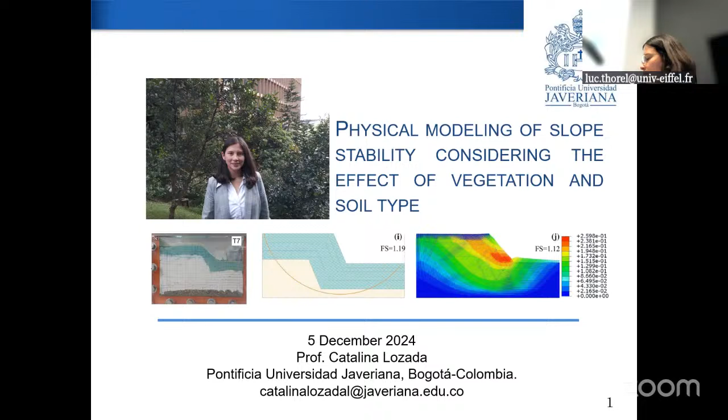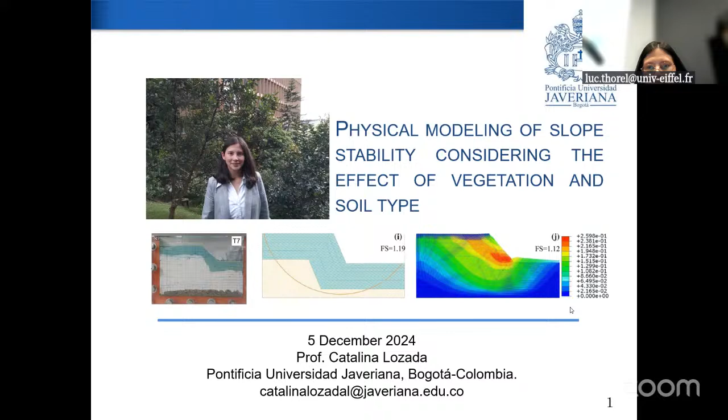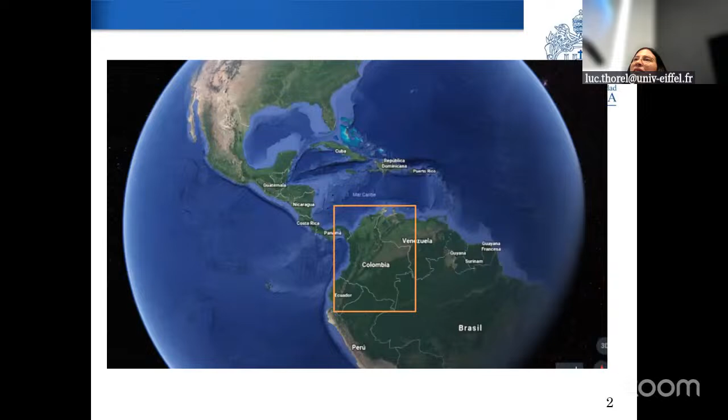I'm coming from Colombia. It is a country located in South America, in the north of South America. I'm coming from Bogota. Bogota is a city of almost 8 million inhabitants, and we have an altitude of 2,500 meters above mean sea level.

This is the university I'm coming from. It's a Catholic university, one of the oldest universities in Colombia. There are almost 30,000 students, and I belong to the civil engineering department.

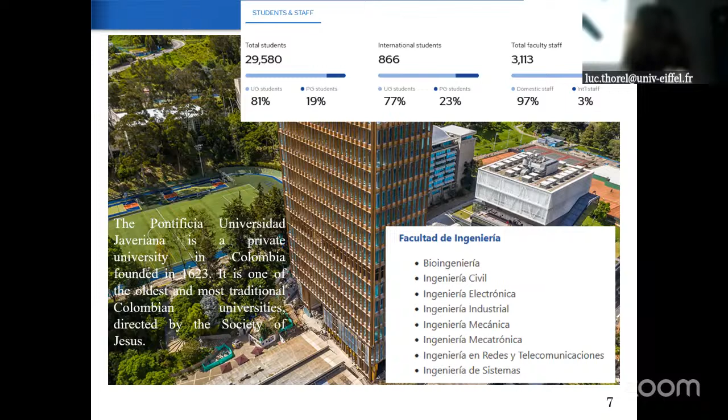This building, as you see here, is the laboratory engineering building. We have many facilities.

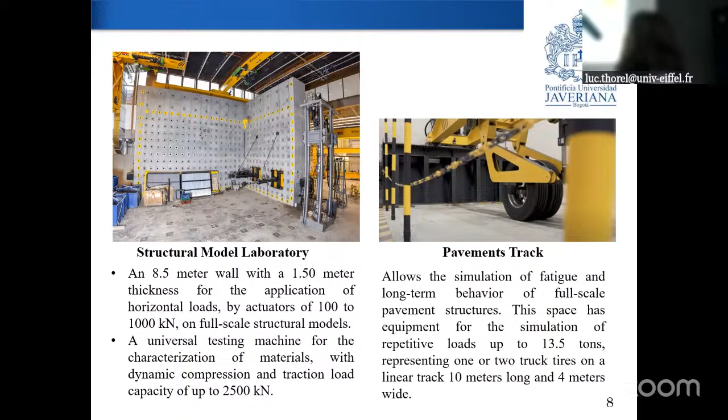There is a big reaction wall for simulating buildings at real scale, to apply loads with these actuators. There is also a pavement track to simulate fatigue and long-term behavior of full-scale pavement structures.

And also we have a laboratory for geotechnical engineering. We have a cyclic triaxial test, Bender elements, resonant columns, simple shear cyclic test, and hollow cylinder test, among others. A large shear test to test geosynthetics also.

I am a member of the research group CECATA, the Center for Studies in Roads and Transportation and Related Fields. We are 6 or 7 professors. Fredy did his PhD here a long time ago, I think in fatigue. I don't know if you know him.

So we have 3 research lines, and I'm working in 2: comprehensive development of Colombian infrastructure, and analysis and modeling of geotechnical processes. The objective of this group is to develop, validate, transfer, and adopt technologies in areas related to infrastructure.

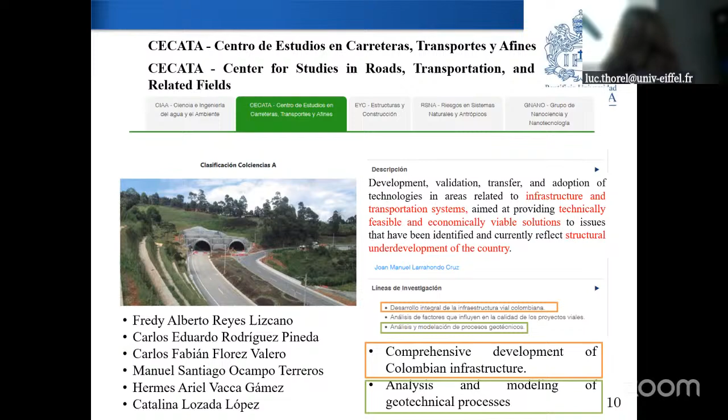In the first part of this presentation, I would like to show you some challenges we are facing in Colombia. We have the Andes mountains that begin in Argentina, in the south of South America, and in Colombia they are divided into 3 mountain ranges: the Eastern, Central, and Western Mountain Ranges. Bogota, for example, is located here in the Eastern Mountain Range.

So we face many problems about slope stability in urban areas, because Bogota is located just at the border of the mountain. In fact, we have a very deep clay deposit, but we also have problems of slope stability, and also highway infrastructure problems, because the main cities in Colombia are located in the Andes mountains.

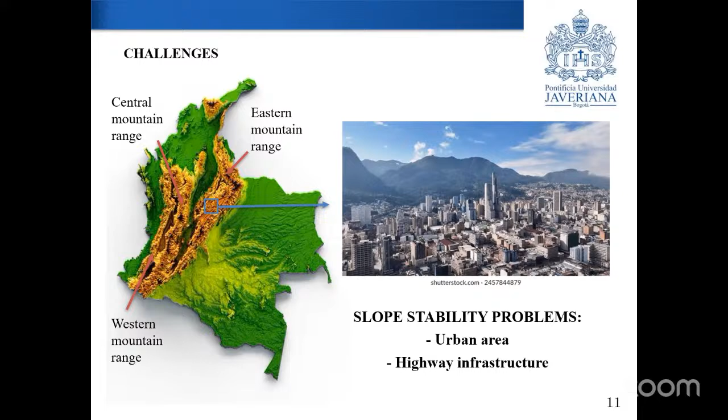So I want to show you an urban problem that we visit with the students. There are many exploitation pits for construction in the city. There are more than 100 quarries at different stages of exploitation. Right now it's not permitted, but there are many environmental problems about this, and also slope stability problems, because many houses are constructed close to these older quarries.

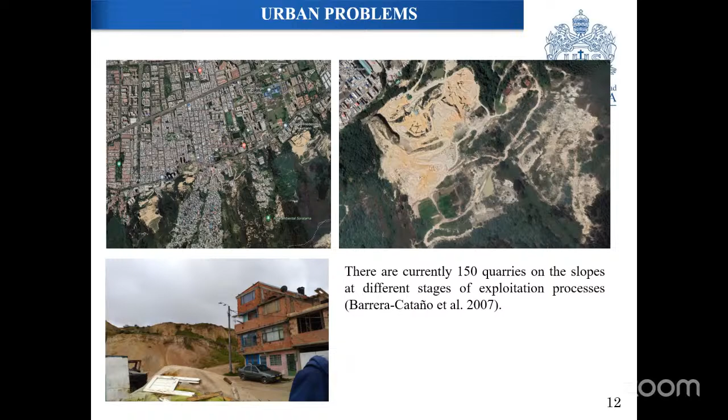These are 2 views with Google Earth. We can see the environmental problems, and we just visited some places that the mayor of Bogota is trying to recover.

So we see with the students stabilization techniques for the slopes. As you can see here, gabions, soil nailings, and some protection to control erosion. Also, they plant native plants to restore the environment there. So we are interested in studying the effect of vegetation, and we would like to understand the effect of native vegetation on the problems of shallow slope stability.

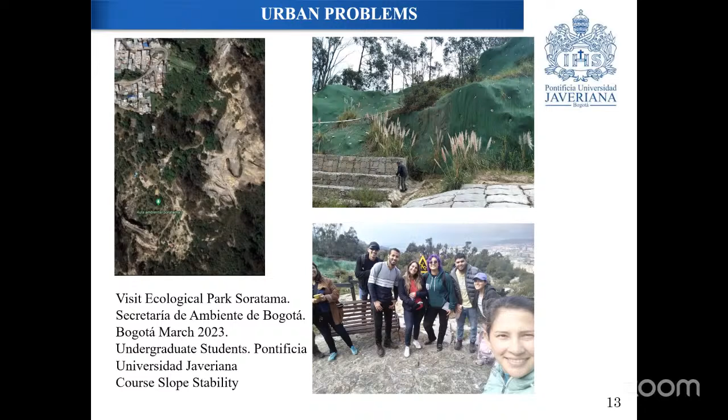So we are here with the undergraduate students, just working around this and to see these problems.

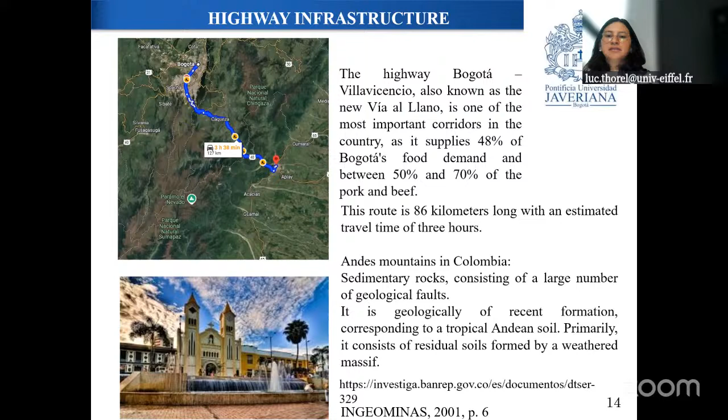Another problem we face in the linear construction of roads is, for example, this is Bogota, and this is another city called Villavicencio. This is one of the main highways, one of the most important highways in Colombia, because around half of the food supplies come from this region, for Bogota. So the road is very unstable. It is in the Eastern Mountains, as I showed you before. These mountains are composed of sedimentary rocks consisting of a large number of geological faults. It's geologically of recent formation corresponding to a tropical Andean soil.

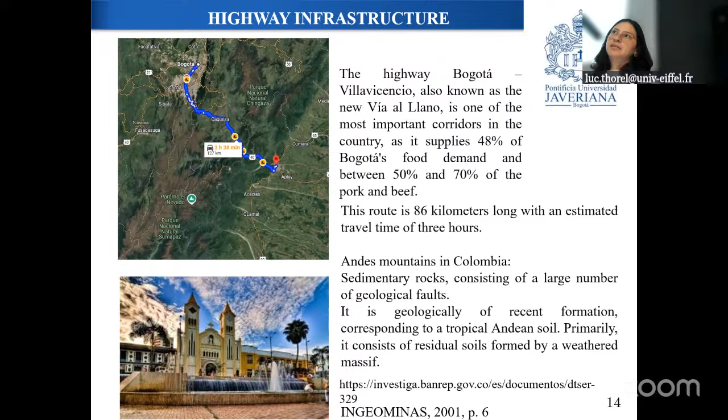Primarily it consists of residual soils formed by weathered massive rock. There is some reference here just to understand the geological formation, but it's very difficult to construct around the mountains in general in Colombia. So the interaction of different types of soils, alluvial, residual, tropical soils, landslide deposits, debris deposits, among others, makes construction very difficult.

Also, we face intense seismic activity and rainfall activity, which makes the slope stability of the highways a challenge, especially during rainy season.

So I would like to show you a video we took in October of this year during a visit with the master's course on slope stability. So we see here a big sliding process, and there was the oldest highway and the new highway that is constructed just to avoid this kind of problem. So we see here two rivers and typical vegetation of this region.

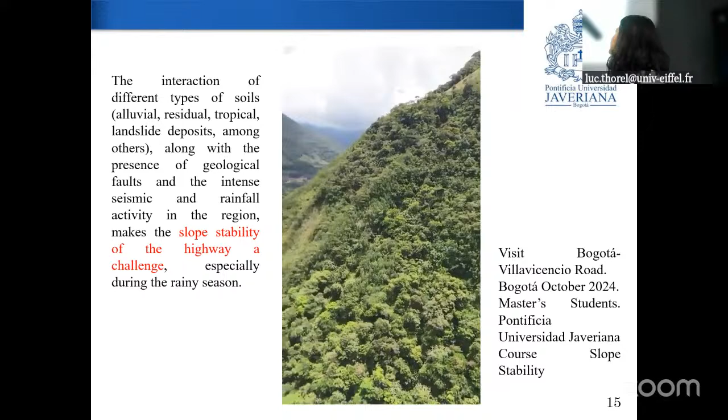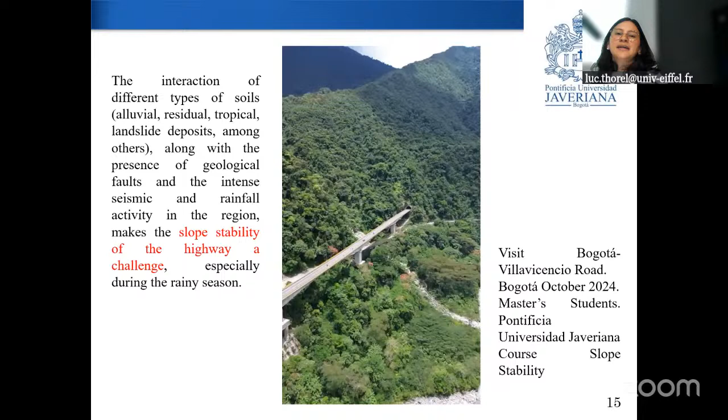This is one of the parts that we visited on the highway, but there are many problems like this in this road. So we were there. Because of that, we are very interested in studying slope stability in general in Colombia.

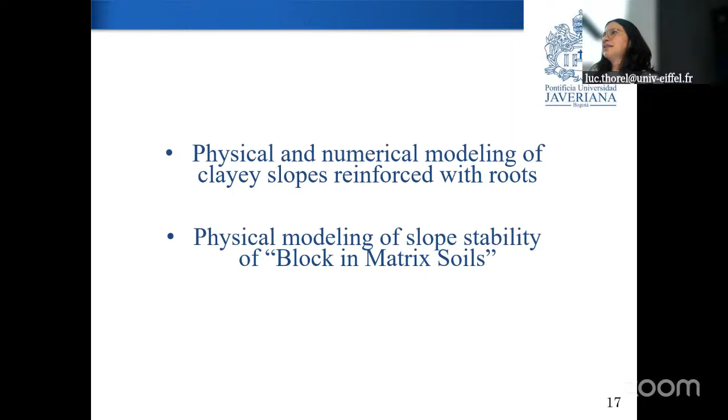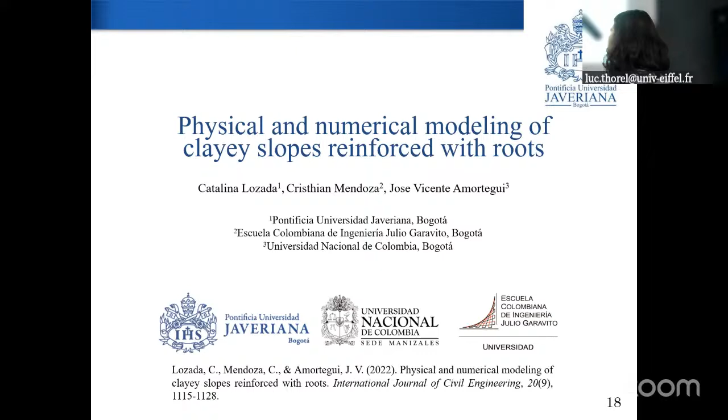The presentation is divided into 4 parts: problem and objectives, methodology, results and analysis, and conclusions. The problem we want to study here is the contribution of grass roots on slope stability. The roots of grass improve slope stability in 2 ways. The first way is there is a mechanical contribution of roots that increases the soil resistance. It can also function as little anchors inside the slope. But it depends on many variables: root shape, strength, plant age, root depth, root inclination, soil type, among others.

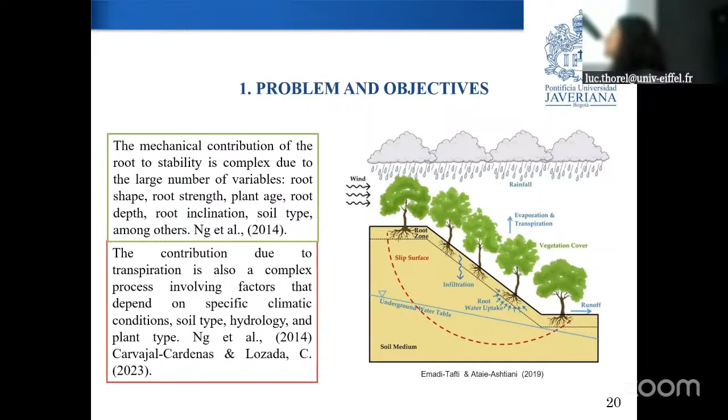This problem has been studied by many researchers, such as this one in 2014. Also, the other contribution of roots is evapotranspiration, as the trees evapotranspirate depending on climatic conditions also. The water content of the soil decreases and the suction level increases, creating an increase of shear strength of soil. So this factor also depends on climatic conditions, soil type, hydrology, and plant type. We also studied this phenomenon, studying the effect of matric suction on slope stability.

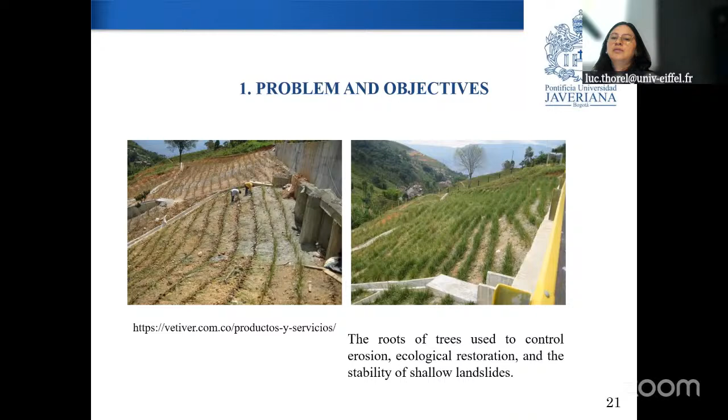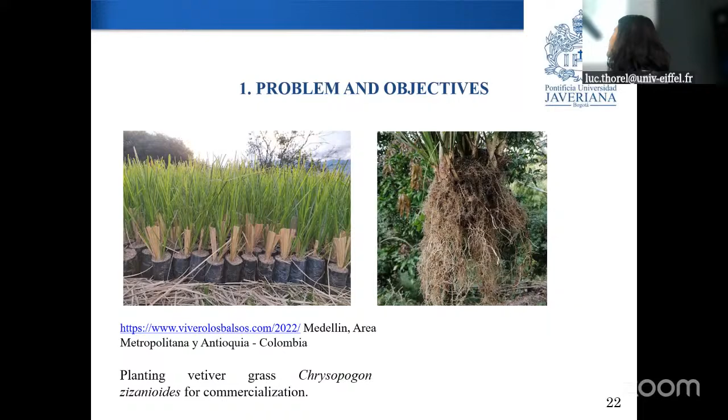But here we want to study the mechanical effect of roots. This is a very common practice in Colombia. There is specifically one type of grass that we use for this: vetiver. It's called vetiver grass, and the roots can be very, very long. They are used to control erosion, ecological restoration, and stability of shallow landslides. They are commercialized. We can see here the plants and the shape of the roots of this plant.

Here we have a figure from this paper, and we see that this grass can reach a depth of 1 m in only 3 months. So this is a very high growth grass. The growth of the grass is very fast.

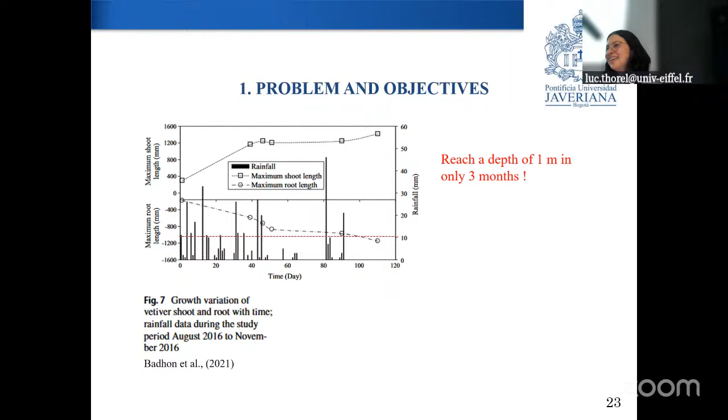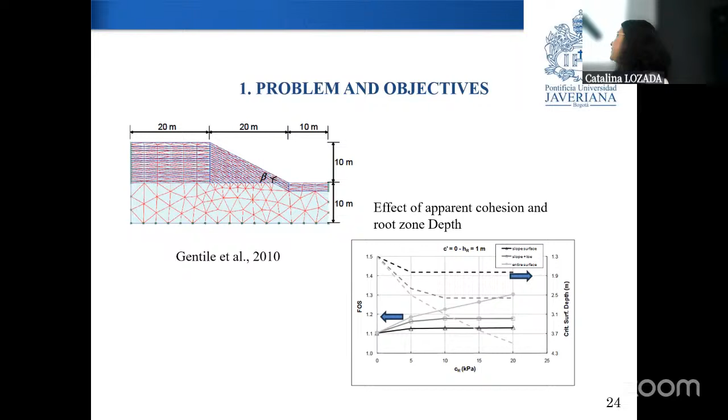So there are some numerical simulations. This is one of them, Gentile 2010. He tried to model the effect of the grass on the soil, on the slope, varying different parts of the growth of the grass. As a result, there is an increase in cohesion due to the effect of the reinforcement of the grass, which produces an increase in the safety factor. Here he made the simulation using finite element tests. Also, he found that the critical surface depth of the slide decreases as the reinforcement increases.

There are many authors that have modeled this physical modeling trying to simulate roots. One tried to print with a 3D printer, others have planted real grass or real trees in the soil. But it's very difficult to simulate in a centrifuge because of the scaling laws of soil resistance, morphology, depth, among others.

Eab in 2015 made some tests in centrifuge also in Japan. They mixed polyester fiber with sandy soil to find shear strength parameters similar to the reinforced soil produced by grass.

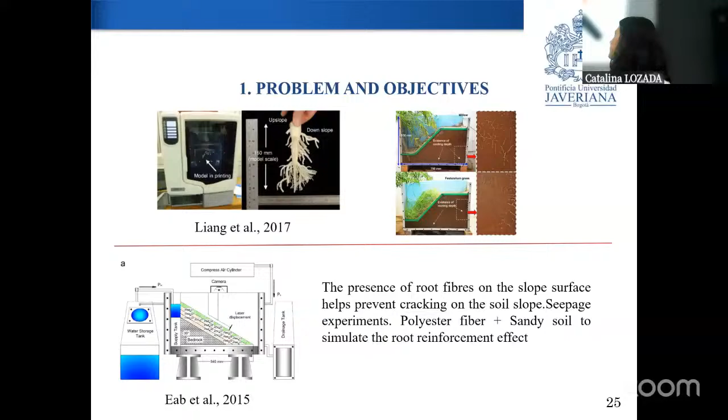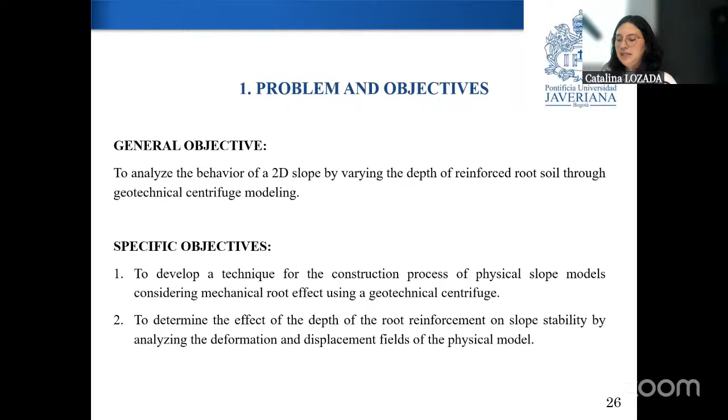So in this research, we analyzed the behavior of a 2D slope, varying the depth of the reinforced soil, through geotechnical centrifuge. First we developed a technique for the construction process, then we determined the effect of the depth of root reinforcement on slope stability by analyzing the deformation and displacement on the physical model.

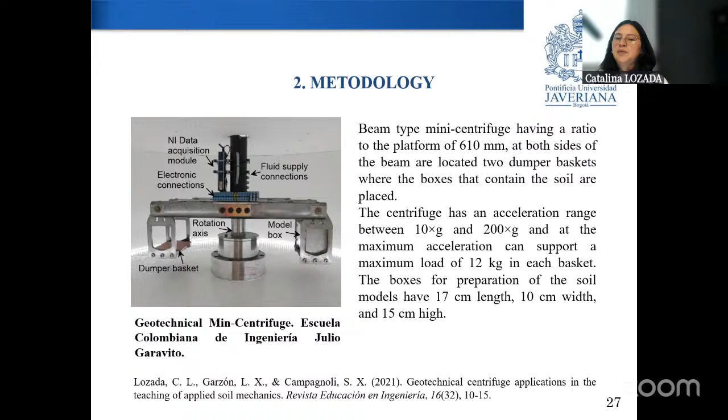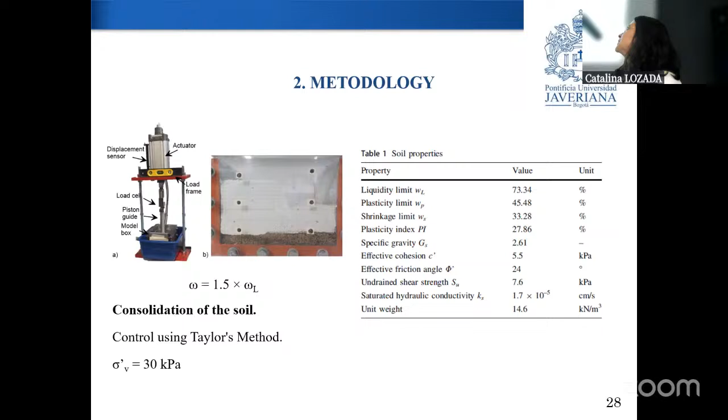We made a triaxial test to find the cohesion, effective cohesion, and effective friction angle. We found an effective cohesion of 5.5 kilopascals and an effective friction angle of 24 degrees. So we mix the kaolin soil, and then after consolidation we cut to reach the geometry of the slope we want to simulate.

So we first make the slope without reinforcement. We try to simulate a slope that fails, reaching a safety factor of 0.8 according to limit equilibrium with the Bishop's method.

So in the centrifuge, we find many sliding surfaces. The model scale was 100, with a time equivalent to the prototype of 42 days.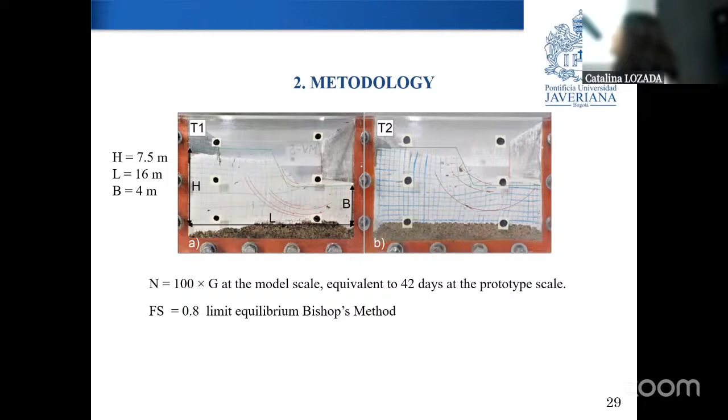This dimension is 7.5 meters, this dimension is 4 meters, and this one is 16 meters, for the prototype scale.

So to simulate the grass, we used fiberglass mixed with the kaolin at the same liquid limit. We mix this, put colorant to distinguish the zone, and place it like this. Then we fill this part with sand, and consolidate again, just to have the shape of the slope.

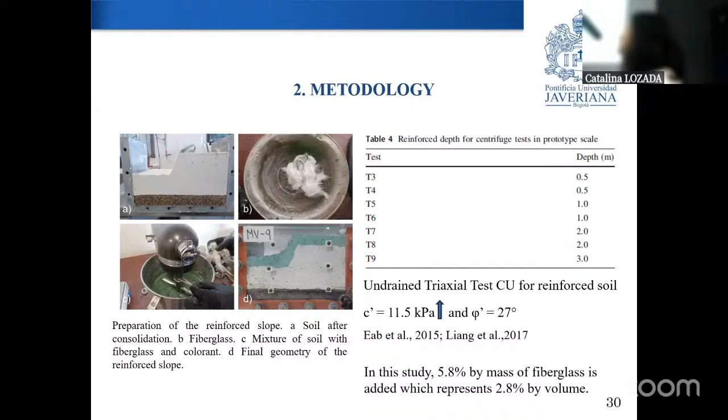We made 9 models, each depth repeated 2 times, just to verify the model. Then we made a triaxial test with the reinforced soil. We tried many times to find the adequate proportion for the models to obtain a cohesion similar to the grass. So we have an increase of cohesion of about 6 kilopascals, and not too much change in friction.

At the end of the test, we made analysis for all of these tests, though I'll show just one here. We made the analysis of the images after and before the test, using the GeoPIV_RG software, defining this line from the crest of the slope to compute the resultant displacements and compare all the models.

So here we have the depth and the resultant displacement for all models. We can see that the models without reinforcement present the higher resultant displacement, followed by 0.5 meters of reinforcement, 1 meter, 2 meters, and 3 meters, decreasing the resultant displacement as the depth of the grass increases.

Here we can see this figure plotted another way: the root depth versus the resultant displacement. We can see there are two slopes in this figure. In the first part, the slope is higher, and then after 1 meter of root depth, the slope decreases, reaching almost a stabilization of the resultant displacement.

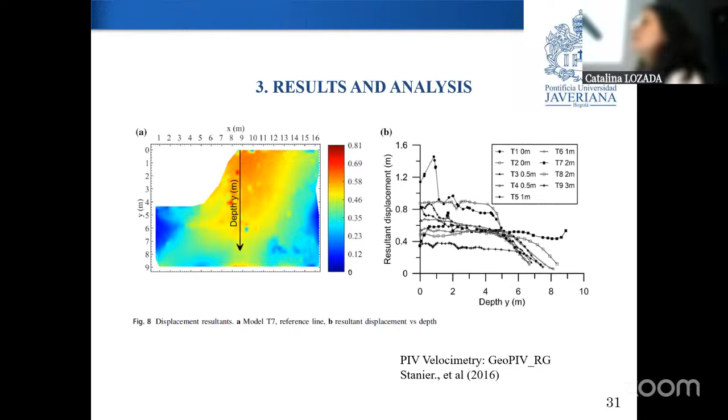We can also see the depth of the sliding surface, which we can calculate here when there is a change in the slope. And we see, as shown in the numerical models before, that there is an increase in the sliding surface depth.

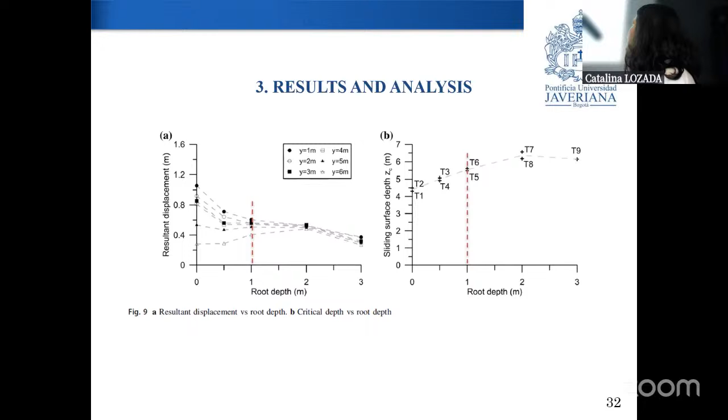So we made 2-dimensional simulations in the Abaqus program, because we need to compare the factor of safety with the limit equilibrium method. We implemented the shear strength reduction method in Abaqus to find the factor of safety using a Mohr-Coulomb model, and also used the GOE5 program for the limit equilibrium analysis, using also Mohr-Coulomb and Bishop's method.

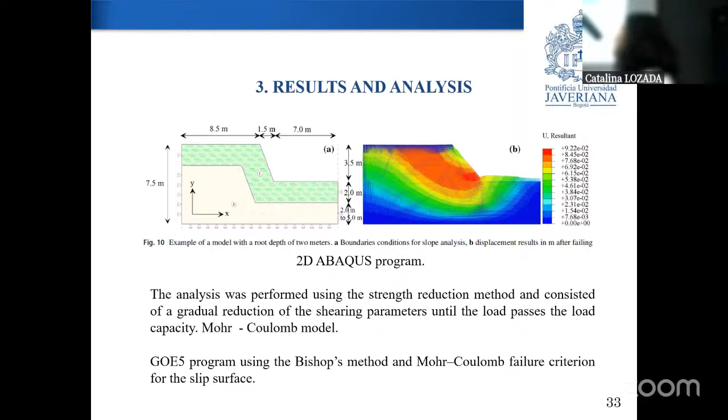Here we have the numerical models, the finite element method, and the limit equilibrium method, varying the depth. As obtained in the experimental test, the depth of the sliding surface depends on how the reinforcement increases. In this figure, we compare the results obtained in the numerical models with Bishop's limit equilibrium analysis and the finite element method, and also the deformation of the crest.

Here we compare the finite element results with the centrifuge test. We obtained higher deformations in the centrifuge test. It's difficult to model in finite element methods because there are very large deformations in the centrifuge, so there is some error here, but we have the same trend.

We find that at about 1 meter of reinforcement, we have almost the same value of deformation of the crest. Also, we can see that the factor of safety increases until 1 meter of reinforcement, and after that point it changes.

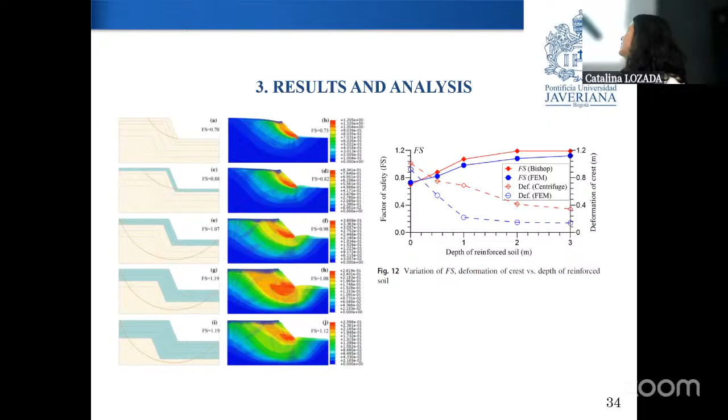This is the first part I wanted to show you. The conclusion, I think I already mentioned it. This is the bibliography, and I think I have time. Now the other part is physical modeling of slope stability of block in matrix soils.

This work was performed by Pedro, the master's student who conducted all the tests. We presented this work at the Colombian Congress of Geotechnical Engineering in November, from the 5th to the 9th of November this year.

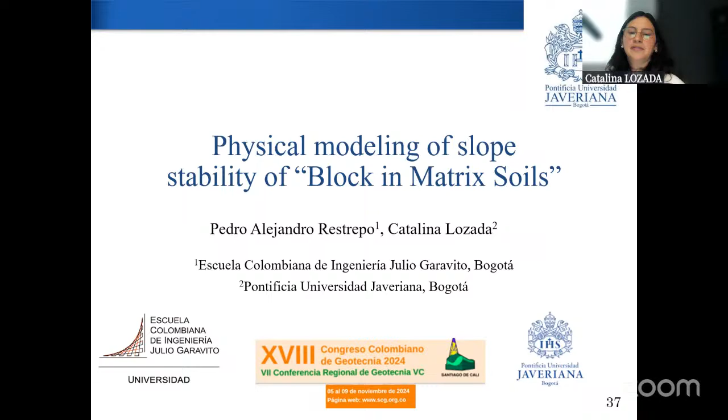As I showed at the beginning of the presentation, we face many problems because of the geology of the mountains generally in Colombia. We have many materials, a wide variety of deposits that we can consider block in matrix soils: residual soils, mud flow deposits, debris flow deposits, colluvium, torrential deposits, among others.

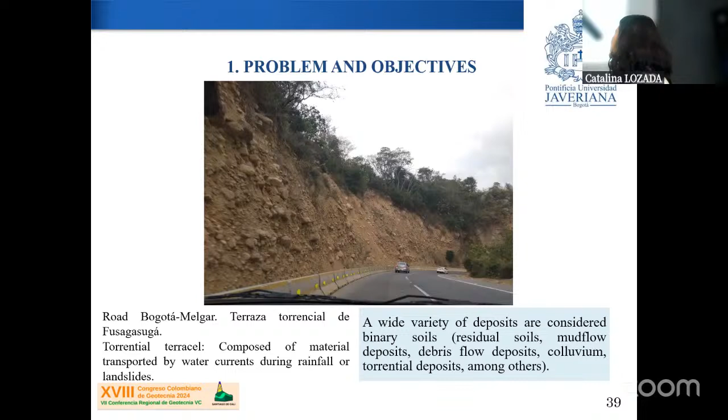For engineering practice, it's very difficult to design for this. When we ask how they determine the parameters to design these slopes, they rely heavily on back analysis to find parameters, because doing a conventional test on this soil is not representative of the actual scale of the problem. So it's difficult, and it's a challenging question.

Here we see an almost vertical slope as well. This type of soil has been described and studied mainly by Medley and Napoli, around 2021 and 1998, who named it blocky matrix soils to describe these mixtures of soil with rock blocks applied to slope stability. It's well known from previous research that the weight concentration of particles determines the shear strength, as we see in Vallejo 2000. The behavior in slope stability is directly related to the increasing volume block proportion.

In the triaxial test, we can see from the literature this type of curve, showing behavior of soil that depends on the weight of the fine and coarse fractions. This also depends on the normal stress. For example, at 40% we see an increase of peak shear strength that then decreases at higher values of fines content. We can also see two or three types of behavior relating to the amount of smaller particles.

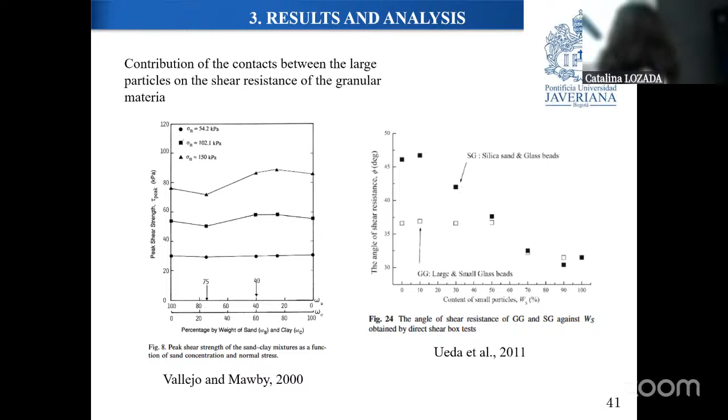These mixtures of soils applied to slope stability have been studied numerically by Medley, Napoli, and more recently Montoya Araque. They find a circular sliding surface in a homogeneous slope without blocks, but the effect of blocks produces a tortuosity in the failure surface depending on the amount of block proportion—specifically the volumetric block proportion, or in 2D analysis, the areal block proportion.

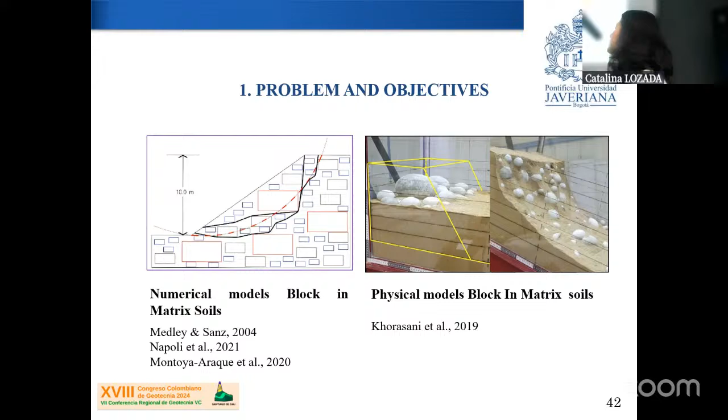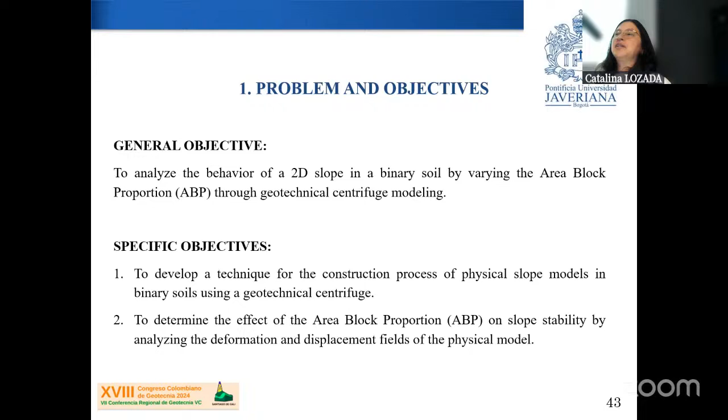I found this physical modeling study, but in a 1G test, at reduced scale. We wanted to analyze the behavior of this slope in a binary soil, varying the area block proportion, using the geotechnical centrifuge. Our first objective was to develop a technique for the construction process, and then to analyze the deformation and displacement fields, using the same machine as I showed you.

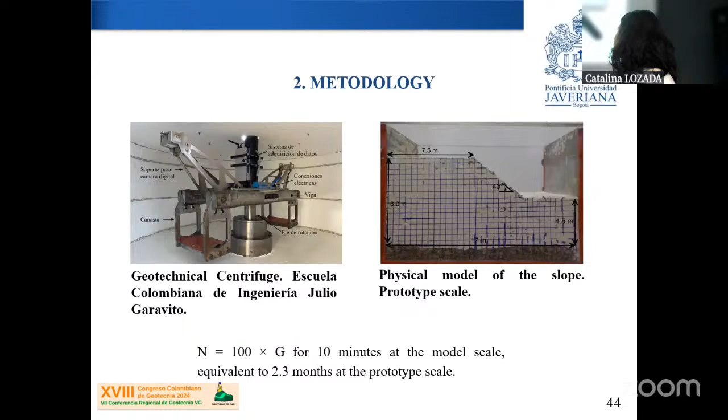These are the physical models of the slope. Medley in 1994 established that there is a characteristic dimension for these types of problems, and in slope stability it is the slope height. In this case, the height of the slope is 3.5 meters, this dimension shown here.

He suggests that particles with a dimension higher than 5% of LC are considered blocks, and less than 5% are part of the matrix. If the particles are higher than 75%, rock mechanics should be applied.

So we use this to obtain the dimension of the simulated blocks at a prototype scale. We use a diameter of 0.8 meters, which corresponds to 23% of LC. To simulate the blocks, we use aluminum bars that have a density of 2.7 grams per cubic centimeter, to simulate the rocks.

We did these four models, varying the areal block proportion: 11, 14, 16, and 19%. We didn't have time to do more simulations, so we just have these configurations.

We tried many different techniques to prepare the soils, because it was very difficult, as we also had to consider the compressibility properties of the soil. At the first step, we just prepared the slope and the soil, mixing at 1.5 liquid limit, and then put the bars inside.

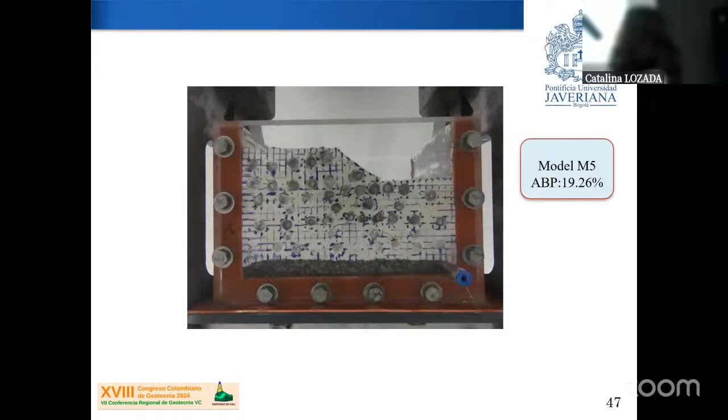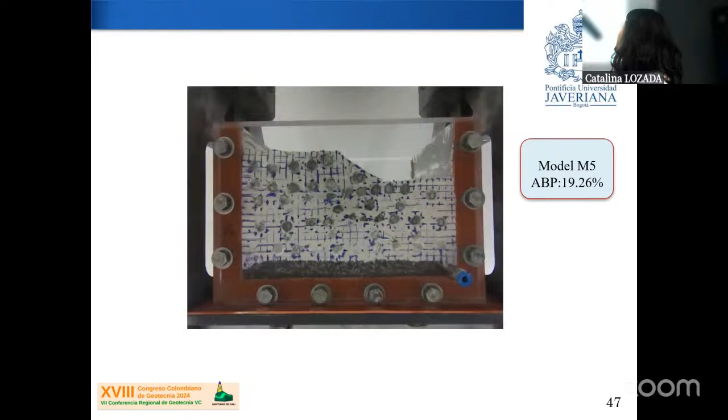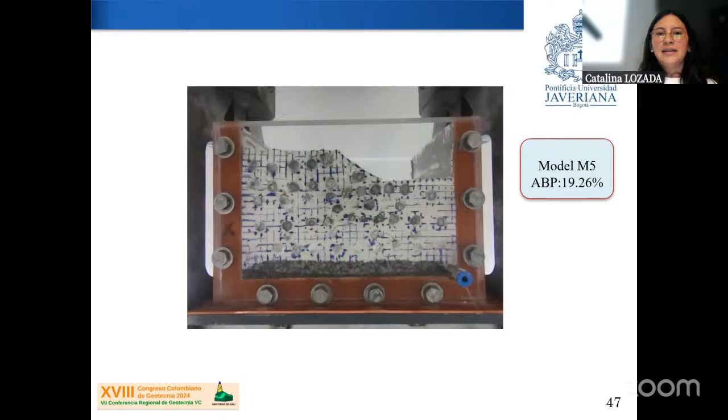You see? No? We can see it again. Okay, this was accelerated, it wasn't so fast like this.

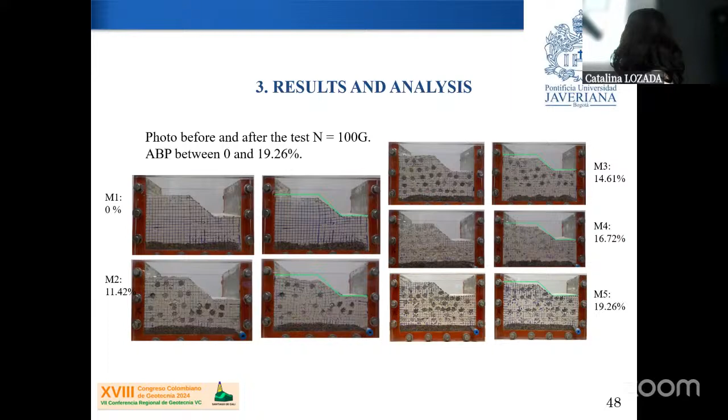And then we analyze also the photos at the beginning and at the end of the test, for all the models we prepared. And we made the analysis, same as I told you before.

We find in all the models a rotational failure at the base of the slope. This is the homogeneous one. In all the models, the failure exceeds the toe of the slope.

The displacement vectors show greater homogeneity and a more defined surface for lower values. As the areal proportion increases, there is variability in the direction of the vectors, and we can see more heterogeneity in the resultant displacements of the models. This indicates tortuosity, and increasing tortuosity, as was mentioned in numerical models.

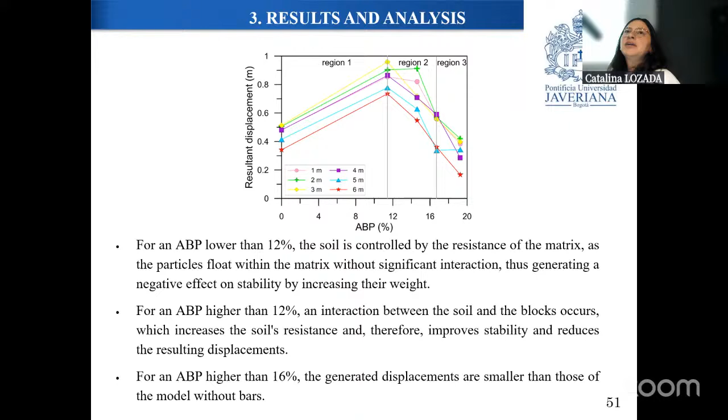In future work, I would like to do the numerical simulation of this, just to compare the tortuosity and, in general, the mechanism with the theoretical, physical, or numerical models using finite elements.

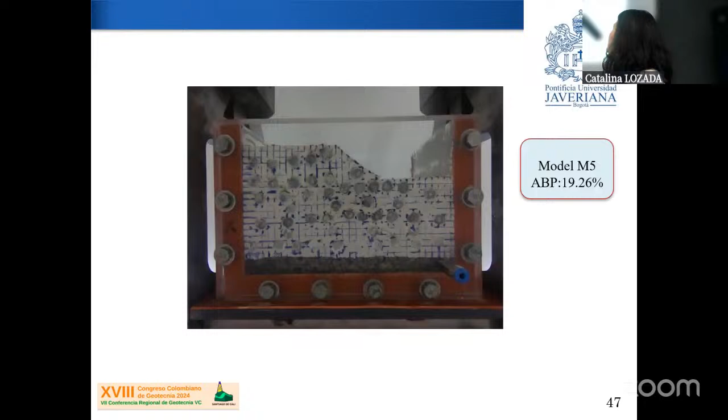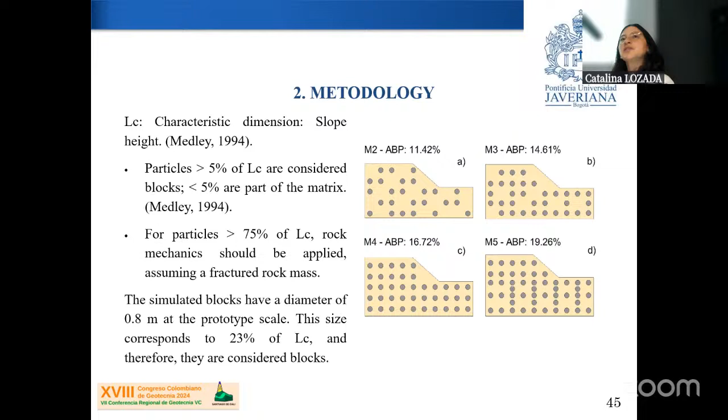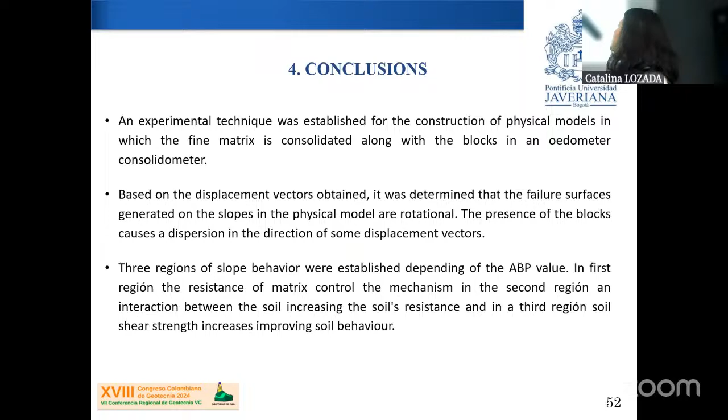Also, there are many questions here about varying the distribution of the blocks, to simulate some geological arrangements. So that's the conclusion, which I already told you about.